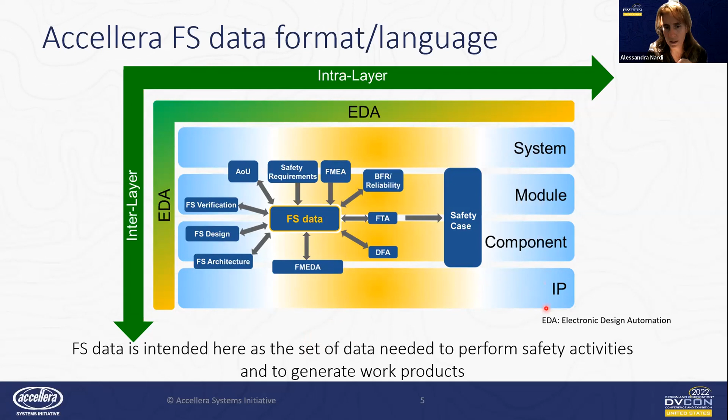And we feel EDA is kind of an enabler of all of this. Okay, so when you see the picture in the middle, it doesn't mean it's only related to component and module. It's actually across all of the 4 layers that we're showing here. So if you go to the next slide, please.

How does this sit with the rest of other standards that are already existing? So the idea is that the functional safety standard we are developing is going in addition to the existing design standards. So the box that you see on the left that includes the design standards, for example, Verilog, VHDL, SystemVerilog, SystemC, whatever, we're not going to interfere with those. They are actually complementary.

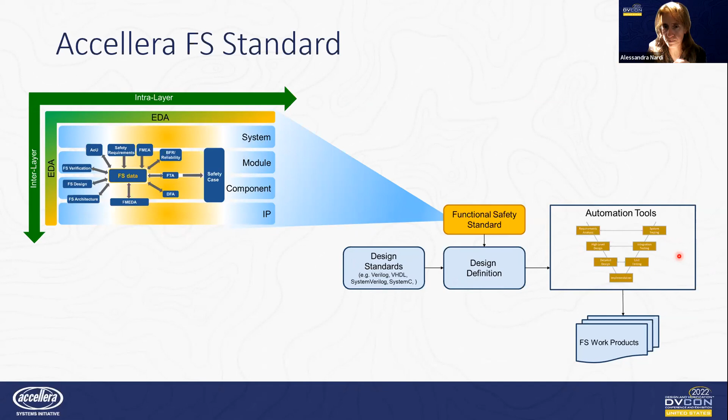What we're capturing is in addition, so that together they give us a design definition for safety activities. And then what you see on the right is the box that shows, at the conceptual level, the V model. Meaning, hopefully this standard will allow you to go through the V model, through different phases of the life cycle and generate the functional safety work products you need. Okay. So if you go to the next slide, please.

I just wanted to explain how we fit in the landscape of standardization, because there are already a lot of standardization activities around safety. So let's start at the bottom left. I think this picture has been seen in several places. There is the original 61508 standard on functional safety of E/E/PE systems, and then the derivatives of those, specifically automotive, industrial, medical, automation, aviation, railways, and machinery. And so in terms of scope, as I said, we have many angles, right? And initially we are focusing on the automotive one, but we'll extend to the others.

The point we want to make here is that these existing standards are already defining the best practices and guidelines. We're not changing those. What we've seen is putting in practice these best practices and guidelines can have some challenges. So there are challenges for implementation. And those are the ones that I mentioned, the 5 buckets that we have identified as a group. And so the idea is that the functional safety working group is working on defining a functional safety standard with the goal to have higher efficiency, higher confidence in implementing the best practices. Okay, so we think we are an enabler of existing best practices and guidelines.

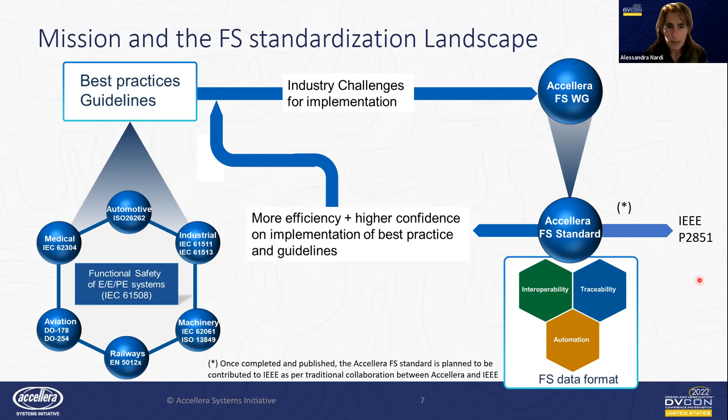And so we are hoping to publish this. We were hoping Q1, but we have had some fierce discussion about a few things. So I think it will become Q2. And then what we plan to do is establish a forum for gathering public feedback. So once the data model is published, then we'll figure out a way to get feedback externally also to the working group. So just one word of caution here, this is all work in progress. It's a working group, nothing is being finalized yet. So what you hear today is progress the team has made. Things can change. As I said, there are very fierce, very lively, interesting discussions.

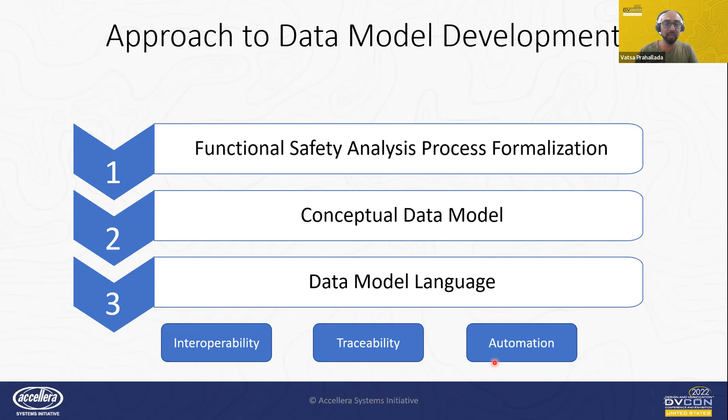Traceability, it's pretty well known and also well explained in ISO 26262. But what we want to achieve is the ability to trace and verify the history and the connection of the information by means of recorded identification. And of course, automation, which is the usage of EDA tools to automate the task of manipulating, storing, and exchanging the information. The most visible need for automation is the connection between functional safety content and the design information.

So let's talk about the FMEDA process. The FMEDA systematic analysis is a bottom-up inductive analysis of the ways the components of an architecture can fail and how the device architecture can mitigate. And when I say mitigate, it is like detect or control such failures to maintain a safe state.

So there are 6 boxes. I'll start with design under analysis. It is a comprehensive list of all the components, typically hierarchical. Functional safety analysis hierarchy: the portions of the design which are safety related and which have the potential to violate the safety goal or the safety requirement.

Failure mode hierarchy is an enumeration process of the possible failure modes of each component that can cause its failure to function as specified, right? Failure mode effects: basically the effects caused by the failure modes at the component level, against the top level safety goals or functional safety requirements of the system.

A safety mechanism library is a set of approaches which can mitigate, again, either detect or even correct each component failure mode to bring the system to a safe state within the requisite time. And technology elements are within the design under analysis.

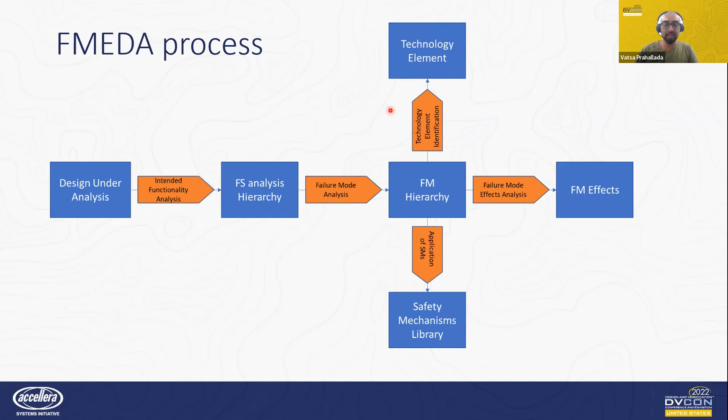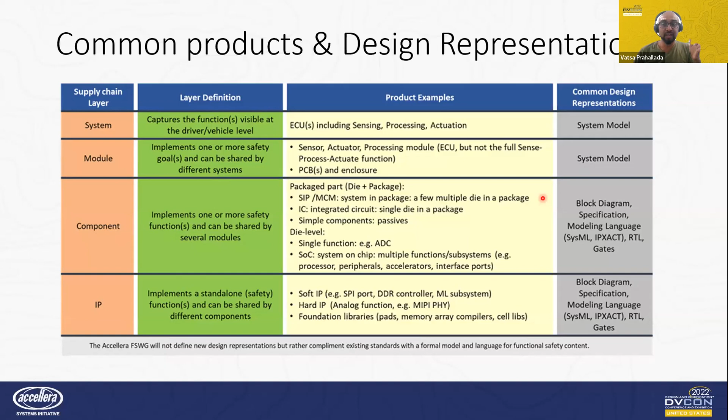Let me explain the concept of mapping by taking design mapping as an example. It is the mapping between source design that can be represented in any design representation, we already discussed about it, to the functional safety analysis hierarchy. Again, to express this idea in a more concrete example, we are using OR1200 open source RISC processor structural hierarchy. Let me go to that slide.

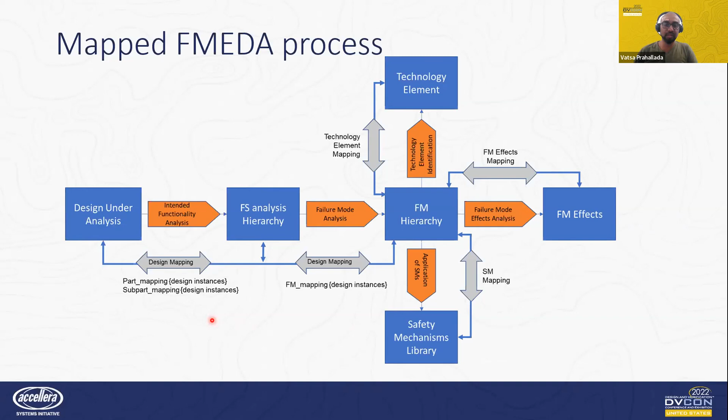Once you accept the simplification of the given design, the part is mapped to the top, and the subparts are mapped to MAC, MMU, and Dcache RAM, respectively. It is important to note that the definition of functional safety hierarchy is not required to align to the design hierarchy. Check out the data model. Again, it might be an eye chart, but the model is representing the following.

The top is mapped to, of course, top, but MMU is mapped to top DMMU top and top IMMU top. Dcache RAM is mapped to DC top and DC RAM. A closer look at MMU is an example that actually demonstrates the mapping is not one-to-one, because for more practical cases, it can be N-to-M kind of a mapping. Similarly, the mappings are defined for all the other entities in the diagram from the previous slides. And again, Darren will cover a few more details.

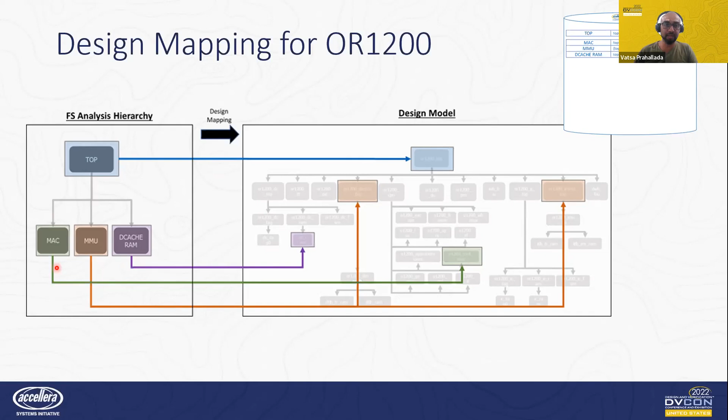So functional safety data categories. Based on some of the intuitive guidelines and rational consensus, Accellera is proposing the following data model with a given set of guidelines. Again, the highlight here is Accellera is providing a set of guidelines. Let me mention a few guidelines here.

Start with the simplest model and add complexity only if there are any specific cases which are not already supported. In general, the more complex or flexible you're trying to make the model, the more rules there are, and then there is a need to ensure consistency and exchangeable models. Select attributes to allow the smallest granularity needed, and so on and so forth.

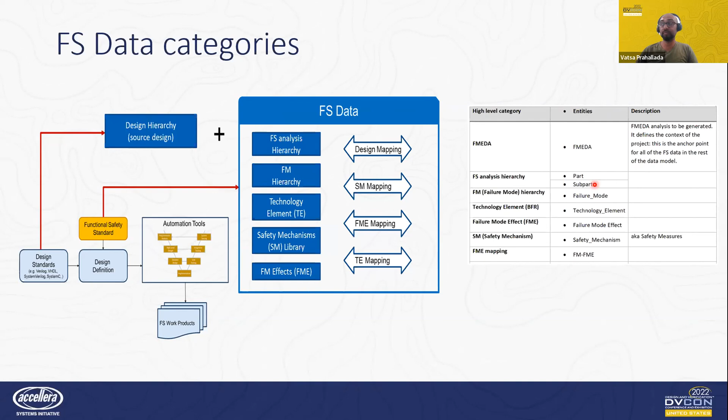Over to you, Darren. Okay, thank you very much, Vatsa. If you could, Darren, quick question: do you want to share, or if you could, please? I can continue. Yeah, please.

Thank you. Okay, so the conceptual data model and methodology discussions. If we can go to the next slide, please. So large parts of this have already been covered by Vatsa, but basically, if we're doing a full set of functional safety data, which we may wish to transmit between the different layers, we need to capture all the different things that the different parties would be interested in. So you have the functional safety analysis hierarchy, the parts and subparts we've mapped to.

We need the failure mode hierarchy. We've got technology elements. By that, we mean what type of technology are we using? Is it a RAM, a ROM? Is it analog, digital? And we need to define that. And we also need to define the sources we are using for those technology elements to say where the failure rates are coming from. So for example, whether it's Siemens norm or the IEC 62380.

We've got the failure mode effects. So where would the failure mode be observed, which could be of particular interest when we're talking intra-layer rather than inter-layer. We have safety mechanisms. You may want to start creating a library of these so that you can share around, but we need to record what we're using to give us the diagnostic coverage.

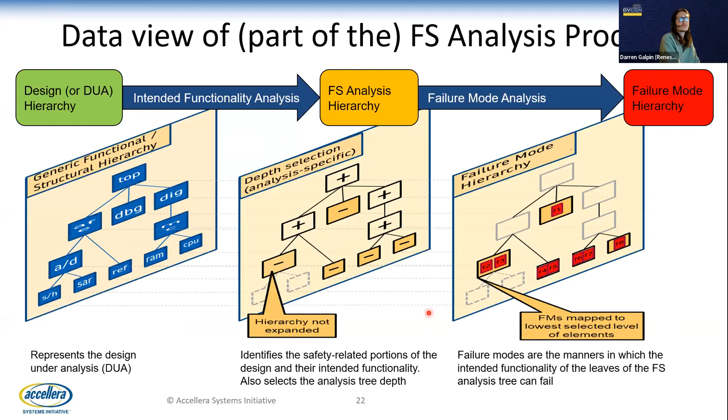So the failure mode, yeah, Carol. So the failure modes are all at the leaves of the analysis tree and are only in the elements which we're considering for functional safety analysis. Obviously, there could be blocks in there which are not considered for analysis, and we need also to flag which ones they're not. All right, so next slide, please.

So looking at the leaf cells and at the lower level, what is it that we actually need to try and record? And this is looking at only a section or a selection of the elements rather than all of the ones that we previously mentioned. So if we're coming to a subpart, obviously we need to have a name and have a description to say what that subpart is, because a subpart, although we've mentioned it before, could actually be part of a real block, or could be several. It's basically a logical description of what we're using for the analysis, and we need some way of mapping it.

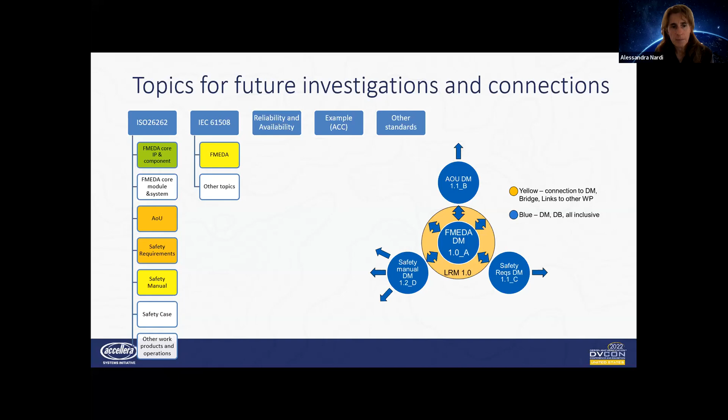So if you go to the next slide, I'll show an example of the type of questions that could be open when we talk about these other connections. Alessandra, I'm sorry, yes, I'm sorry, guys. My brain is gone. So here, the next slide.